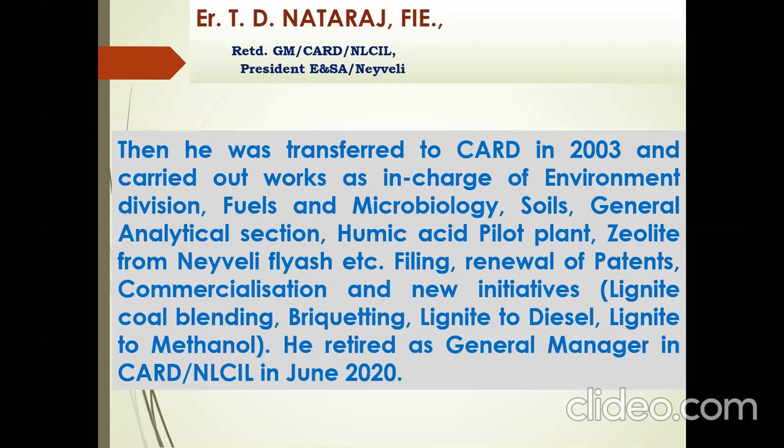Then he transferred to CARD in 2003 and carried out works as in charge of environmental division, fuels and microbiology, soils, general analytical section, humic acid plant, zeolite from Neyveli fly ash, etc. Filing renewal of patents, commercialization and new initiatives, lignite coal blending, briquetting, lignite to diesel, lignite to methanol, etc. He retired as General Manager in CARD NLCIL in June 2020, and still he is continuing as

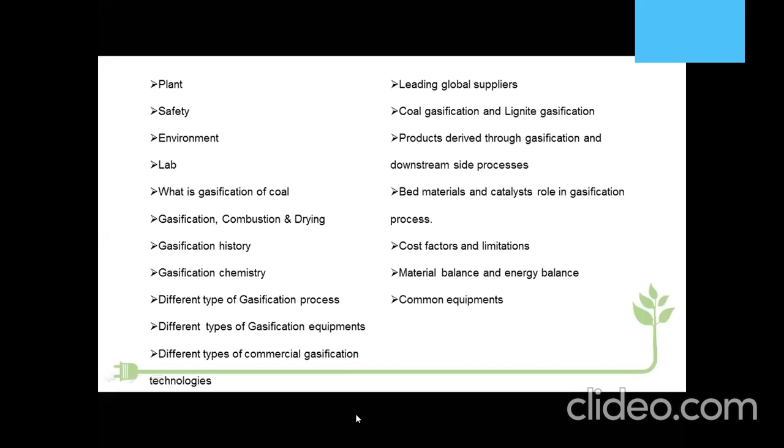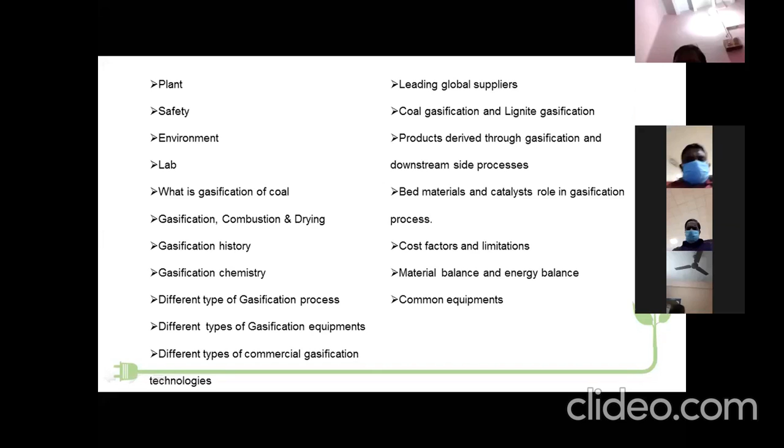You can save energy. So energy efficient, introduction of heat exchangers at proper places, and saving the energy. And another point is pollution. You try to reduce the pollution. Try to reduce the pollution at the bottom. Try to reduce the pollution at the top. So efficient operation is the key of success. They have to do it.

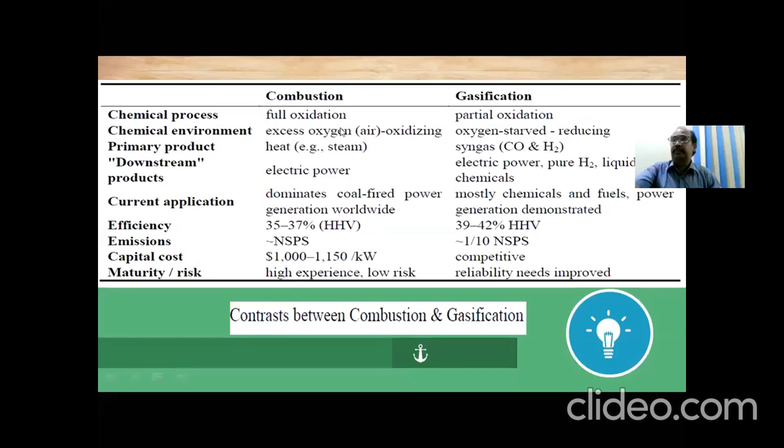And so, the difference between combustion and gasification. Most of you know the basics. However, I will read out what is given for combustion and gasification in this slide. Chemical process: combustion means it's fully oxidized, gasification means partially oxidized. Chemical environment: combustion is an oxidizing environment; gasification is an oxygen-starved reducing environment.

Primary product: for combustion, nothing. After combustion, you will get only rejects, ash, no fuel value. With gasification, you will get syngas. And in the downstream process, you will get electric power, the chemicals, the liquids and other items. Current application: combustion dominates coal-fired power generation worldwide. For gasification, mostly these are chemicals, fuel, and power generation on the downstream side.

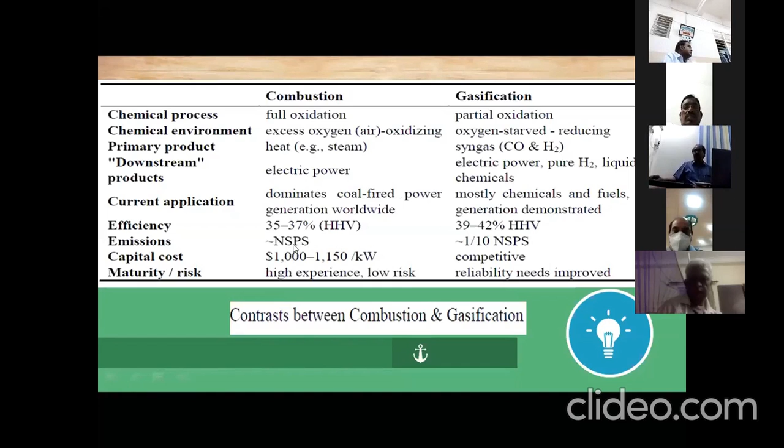Efficiency is 35 to 37% higher heating value for combustion; for gasification it is 39 to 42% higher heating value. Emissions follow the New Source Performance Standards, NSPS. For combustion there is a figure, and for gasification also there is a figure, that should be followed as per the norms stipulated by the Pollution Control Board from time to time.

The CapEx approximate cost is arrived at. They know the combustion side; the gasification side needs to be improved. You cannot do basic R&D while commercializing gasification. Already they should have some experiments, and coal gasification is already there elsewhere. But for lignite gasification suitability, lignite is different from one place to another. Even Neyveli lignite is different from Rajasthan lignite. So the feedstock has to be studied.

For the lignite, proximate analysis, ultimate analysis, heating value matter, and then ash fusion temperature and ash chemistry. Those informations include the Hardgrove grindability index. Coal is hard, with a low HGI number, and lignite has a high HGI number, but it is not strong. It is like a sand mass. The HGI would be 120, whereas coal HGI is approximately 60. So the chemistry and kinetics of the coal and of the lignite have to be studied.

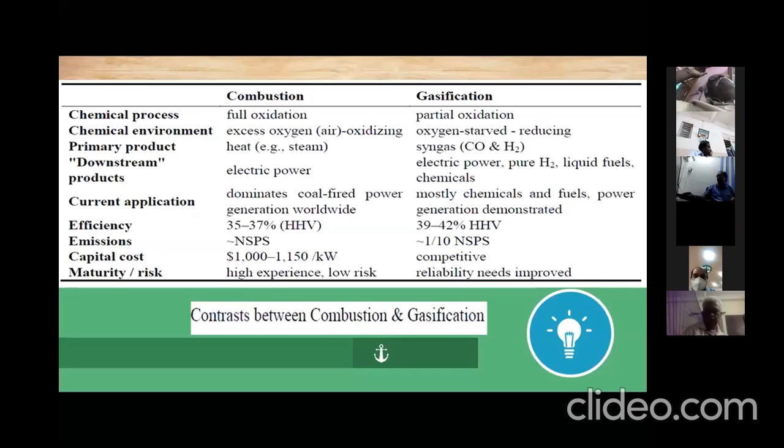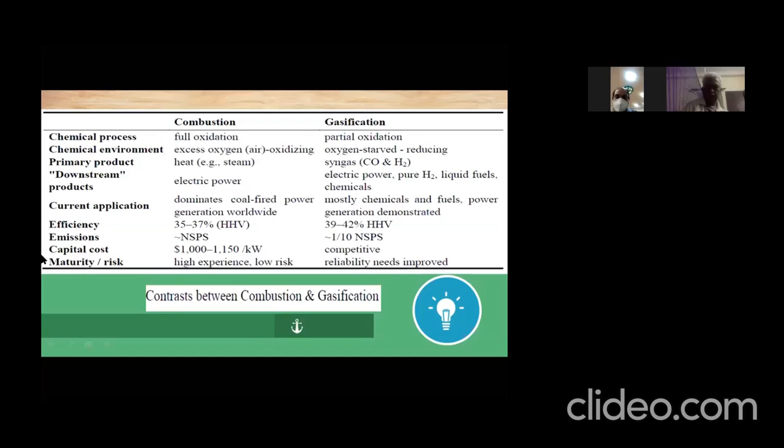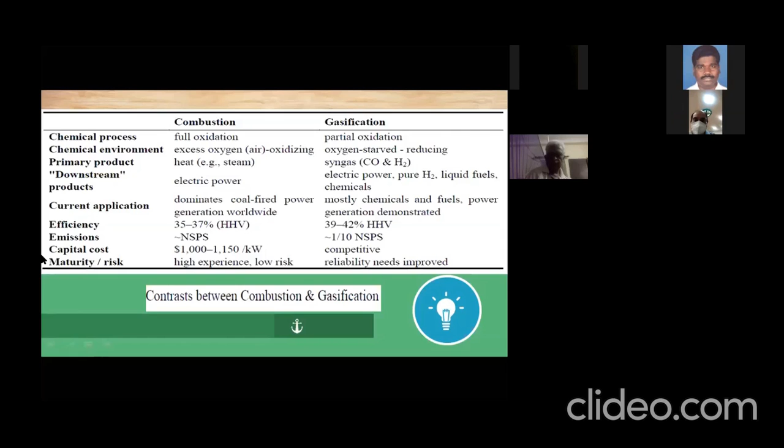You know, the briquetting and carbonization plant started in 1966, but they had already installed the pilot plant in 1957 and did a lot of experiments there. After generating the data, which is available on the net, they established the commercial briquetting and carbonization plant. If you directly invest 5,000 or 7,000 crores and experiment at commercial scale, it is very difficult and will lead to a lot of problems. Instead, with a limited amount, you can do it at pilot plant scale, find out the information, and based on the data expand the project into a commercial one.

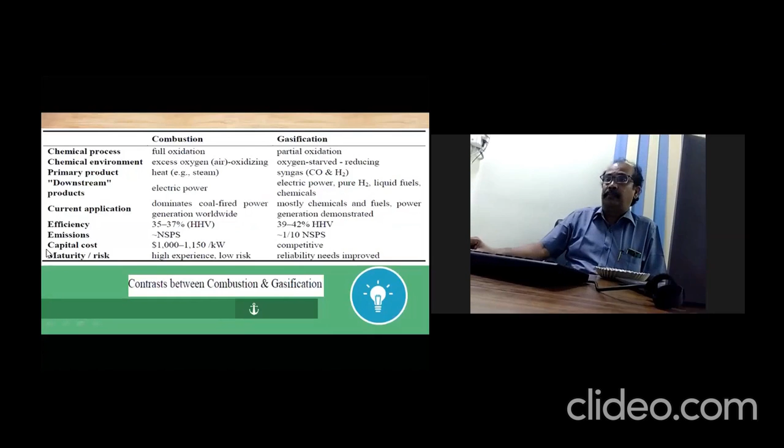Otherwise, if the firm claims they have the facility at their place, internationally or in India, let them quote whatever facility they have. We can move our feedstock, do the experiment at their facility, generate data, and confirm the comfortability of the operation of the system. Once those parameters are arrived at with optimization, based on that you can proceed further. Otherwise, it will be very difficult.

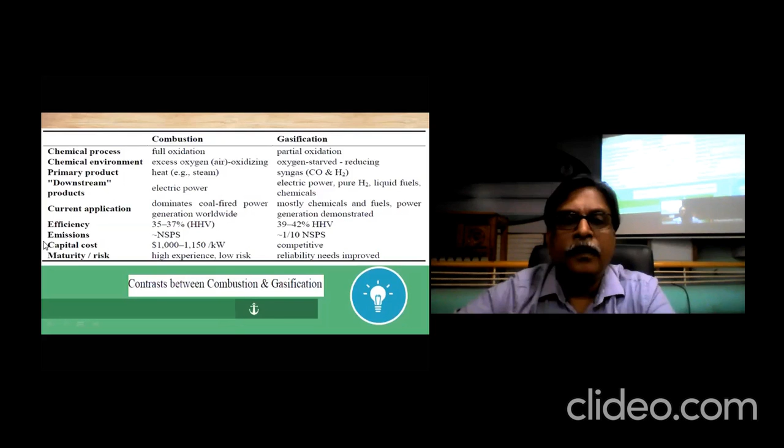What is the reaction? Chemistry of the process. Gasification with oxygen: carbon with oxygen gives carbon monoxide, and this much heat is released. Combustion with oxygen is complete combustion, and that heat is released. Gasification with carbon dioxide: C plus CO2 gives 2CO. These are all the reactions happening inside the gasifier. Gasification with steam: C plus H2O gives CO plus H2. CO plus H2 is syngas. The ratio of carbon monoxide to hydrogen decides the final product; normally for diesel the ratio should be 1:2.

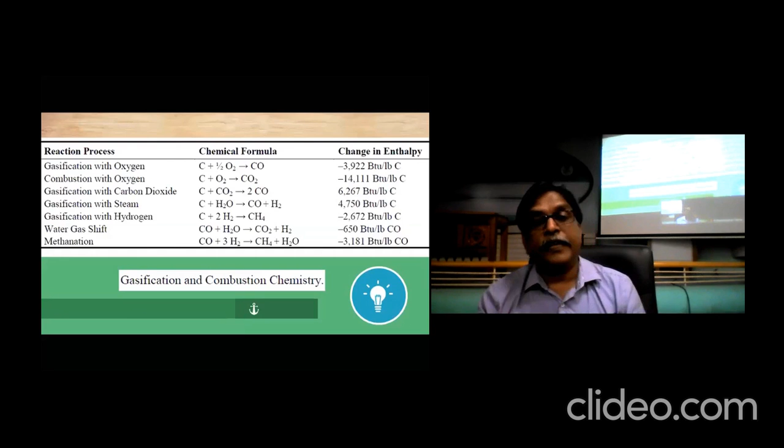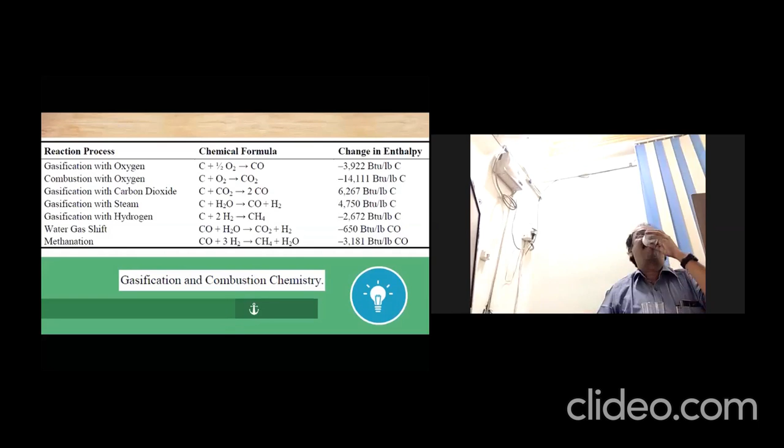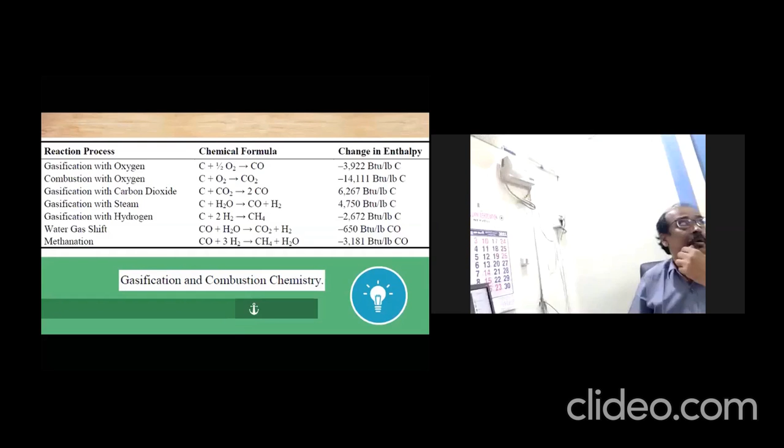Based on that, they use the water gas shift reaction, which increases the quantity of hydrogen and decreases the quantity of CO. That is why it is called the water gas shift reaction. Using that, they fix the ratio based on the requirement of the final product. Then gasification with hydrogen: carbon plus hydrogen gives methane, CH4. Methanation: carbon monoxide plus hydrogen gives CH4. This is the chemistry of the process. So this is the gasification setup.

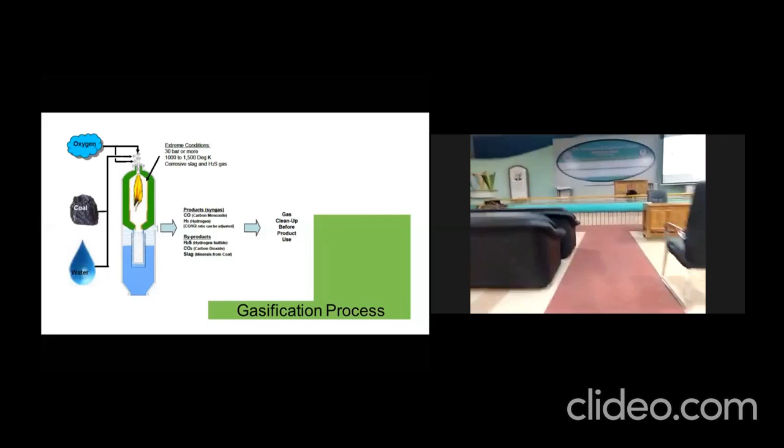How the coal is gasified: coal with the external steam and oxygen for firing. So this coal will fire, and you can gasify the coal. A retort is required.

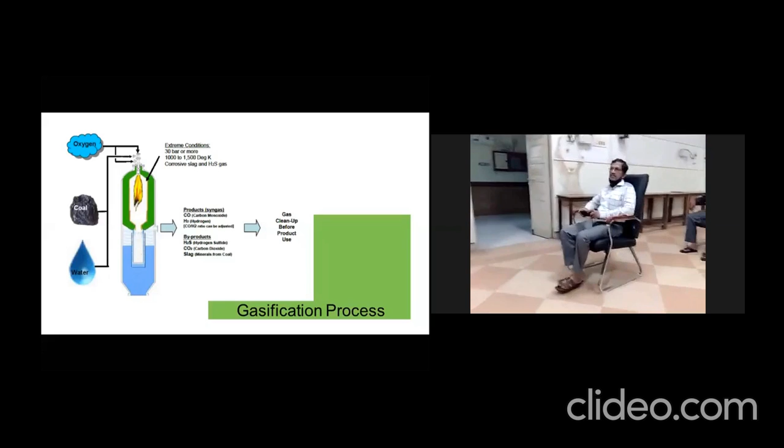So there are three major types. One is fixed and moving bed, another one is fluidized bed, and the third one is entrained flow. Fixed bed means it is a solid material. You have to compact it, or if it is already a solid, then no issue.

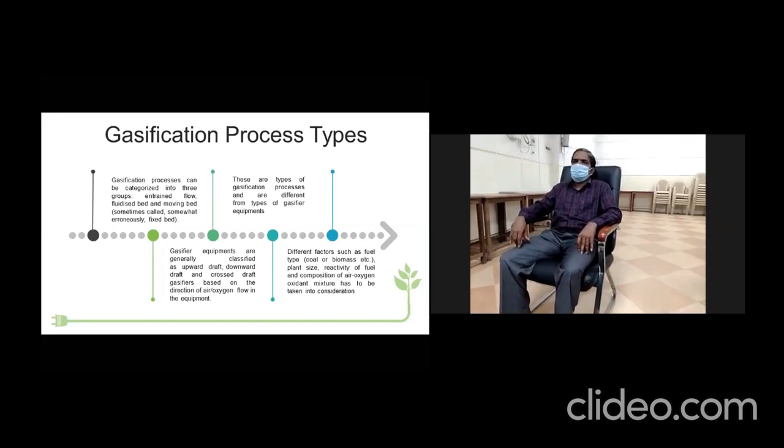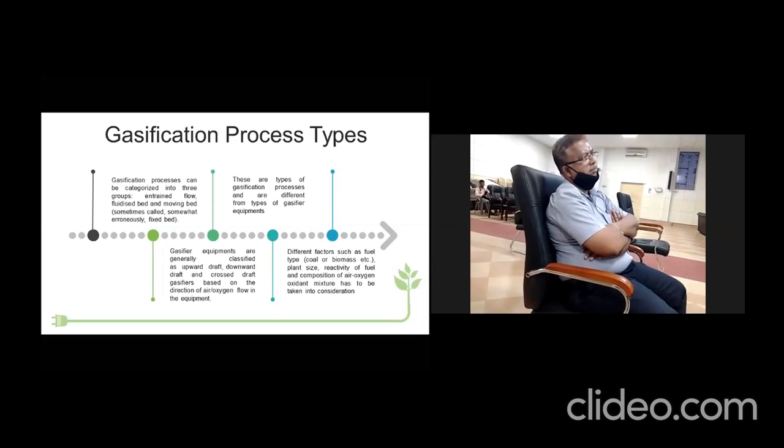So in the vertical retort, another point I would like to explain: there are three types of process. One is updraft, another one is downdraft, and the third one is cross draft. So based on the requirement, the technology will select the process.

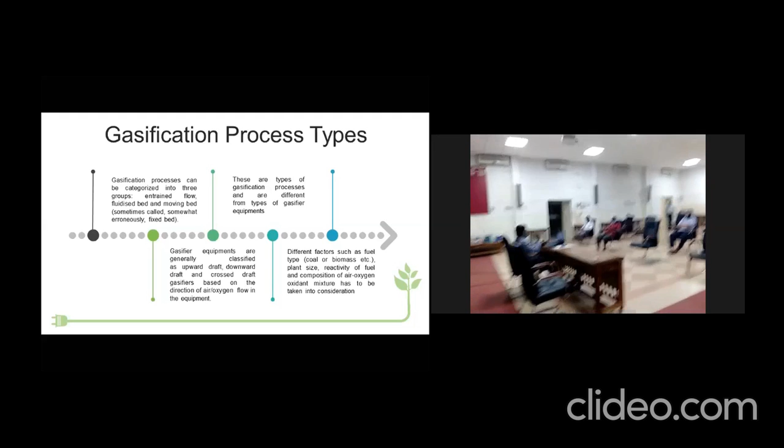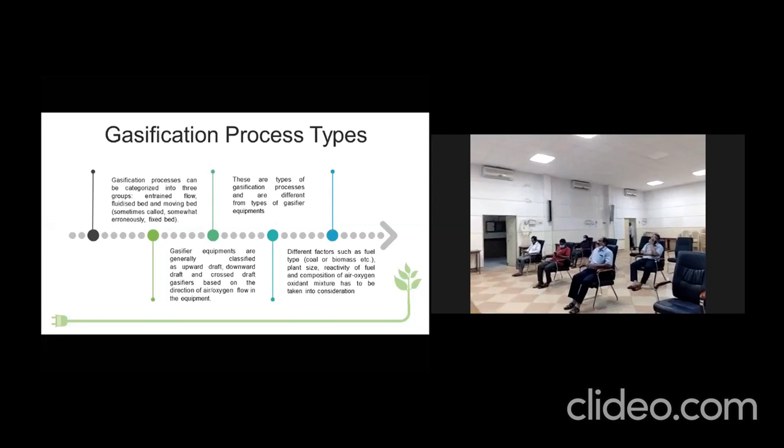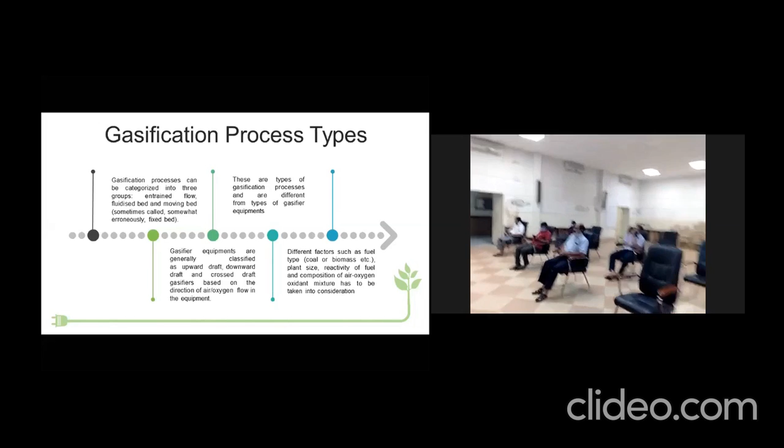And in fixed and moving bed, we use solid for gasification. Fluidized bed means powder material. That powder will get fluidized and then gasified. Entrained bed means it will become a slurry. The material will be totally ground into fine material, and water will be mixed. The slurry is made to pass like liquid fuel. So this is the entrained bed.

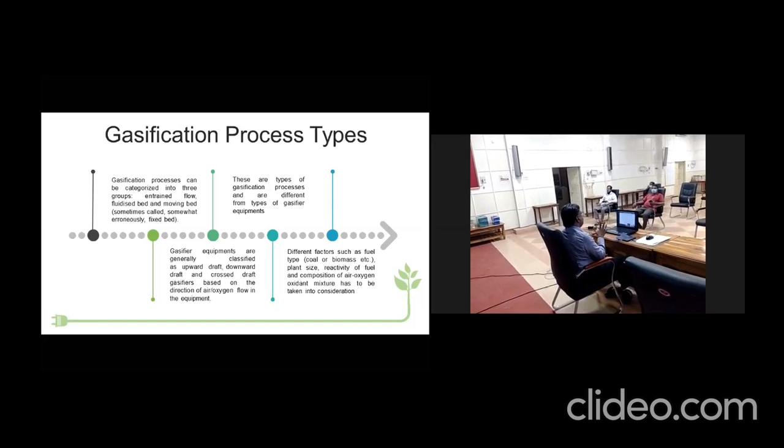Entrained bed is generally costlier. For higher ash content coal, having 30-35% ash, this entrained bed may not be suitable. For lignite, fluidized bed is more apt. Entrained bed is a comparatively costlier affair. The cost will be more if you employ entrained bed.

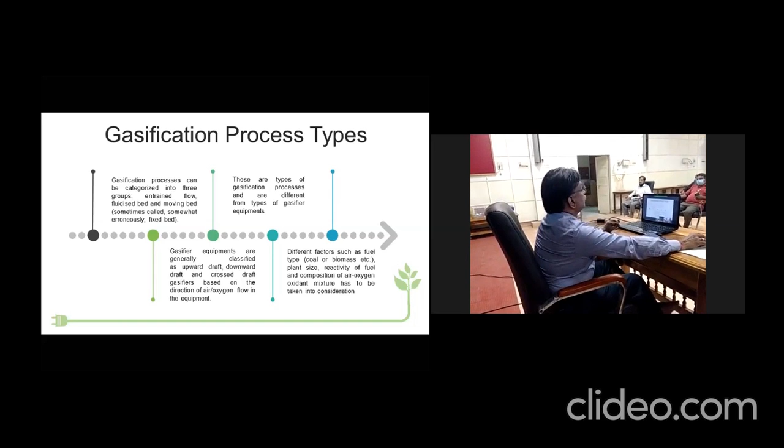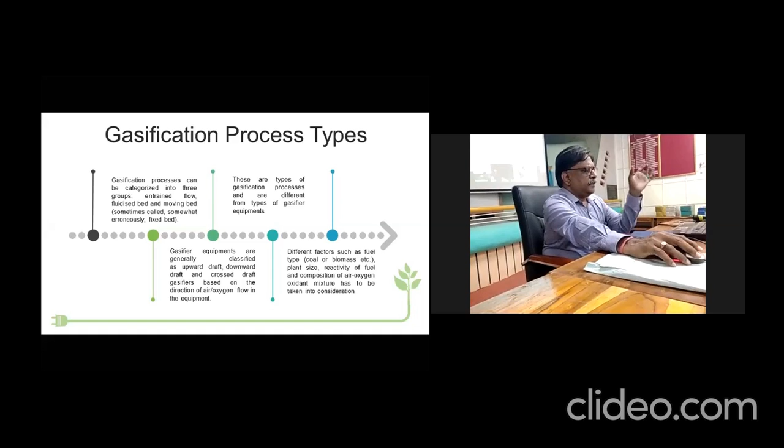But in the entrained bed, the temperature and the pressure are on the higher side, and the conversion also will be high. Perfection will be more, but the capex will be more. So you have to select the process based on your requirement and feedstock. If the capex and your initial investment are more, the product profitability has to be worked out; we should ensure there is some profit. So mainly the equipment cost will decide the success of the project.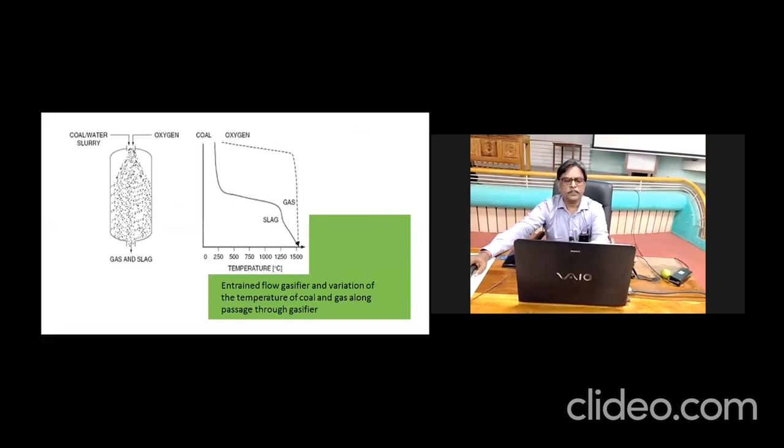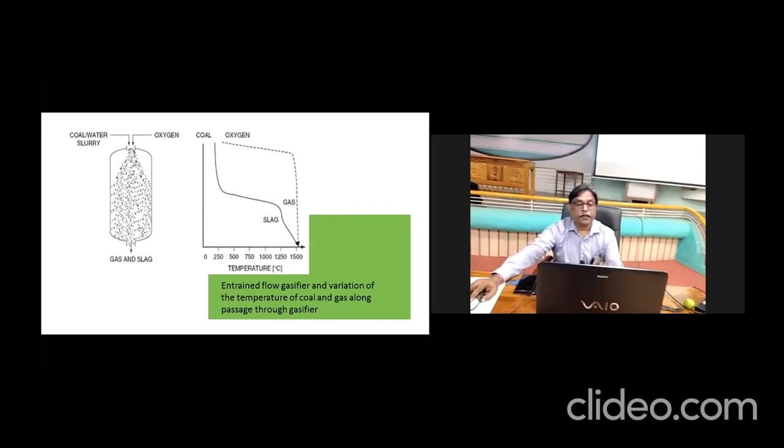Entrained bed gasification. So you can see coal-water slurry and oxygen, and you will receive gas and slag at the bottom. Coal-water slurry and oxygen at the top. In the graph, the y-axis is the entrained bed gasifier from top to bottom: 0 means bottom, and the top is where the coal enters. The x-axis shows the temperature, so you can see the variation of temperature of coal and gas at different heights.

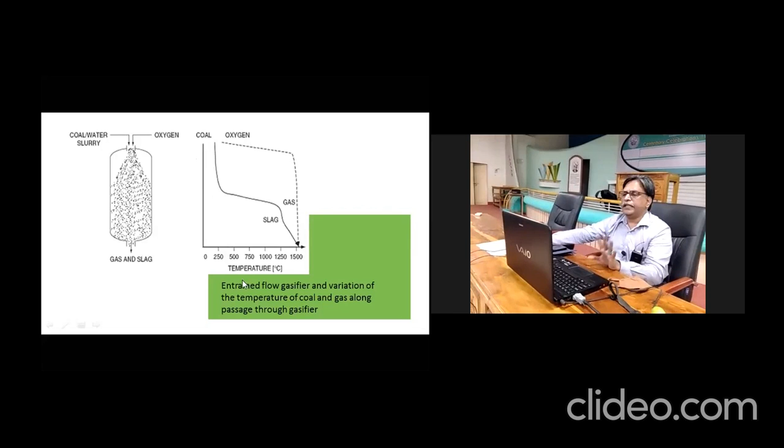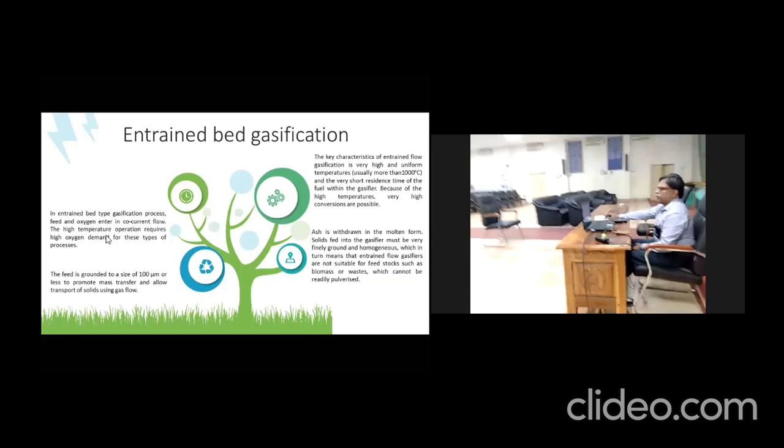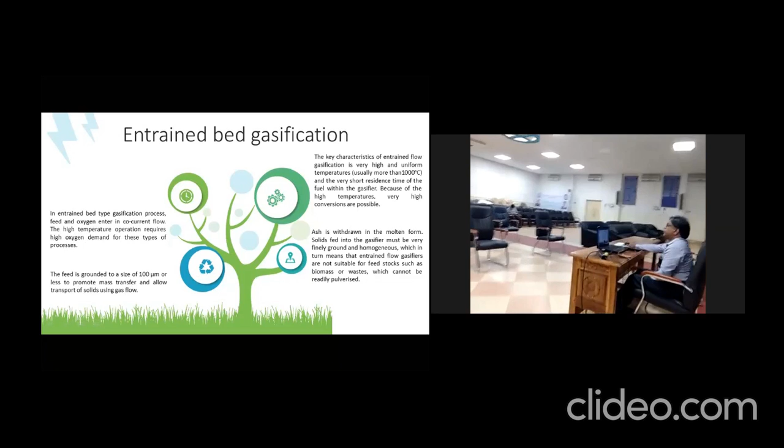This is entrained bed gasification, mainly what I have explained. Feed and oxygen enter in co-current flow. The high temperature operation requires high oxygen demand for these types of processes. Size is 100 micrometers to promote mass transfer and allow transportation of solid using gas flow. The key characteristics of entrained flow gasification are very high and uniform temperature, usually more than 1000 degrees centigrade, and very short residence time of fuel within the gasifier. Because of the high temperature, very high conversions are possible.

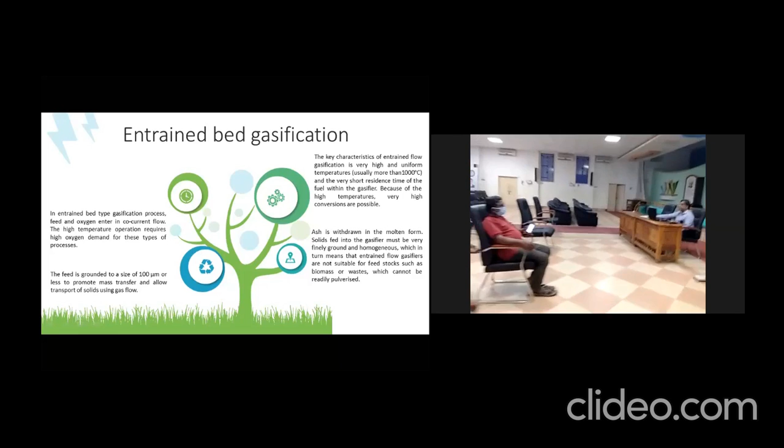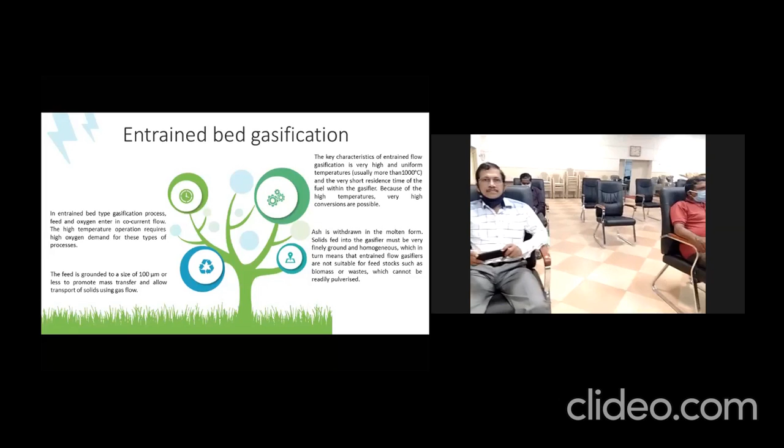Ash is withdrawn in molten form. Solid fed into the gasifier must be very finely ground and homogeneous, which means entrained flow gasifiers are not suitable for feedstock such as biomass or waste, which cannot be readily pulverized. And as lignite has low ash fusion temperature, if ash slag is more, we may find it difficult if we use entrained bed gasification. At present, many offers we have received are based on entrained bed gasification; they should be properly studied. Only then can you move forward.

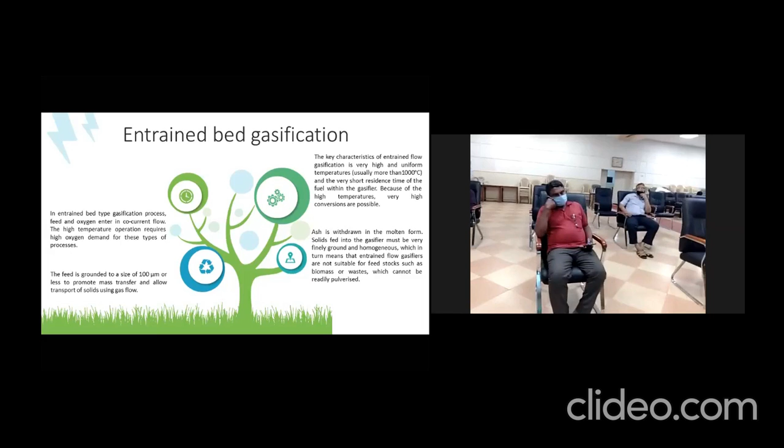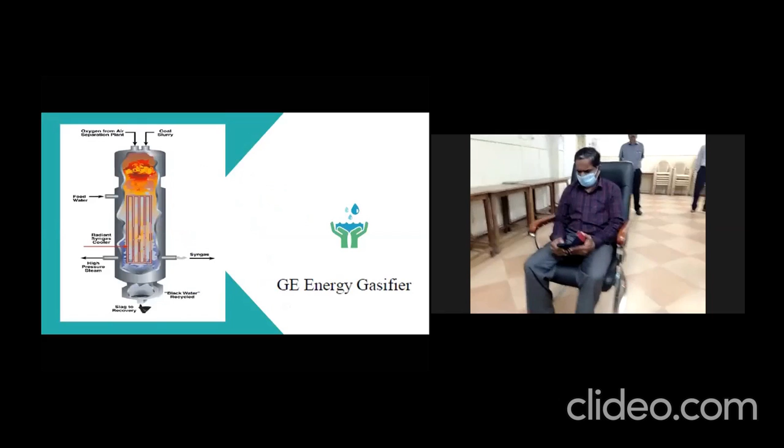And some commercial global suppliers: GE Energy, E-Gas, Shell, Siemens, MHI air-blown, Eagle. These are all companies supplying entrained bed gasification technology.

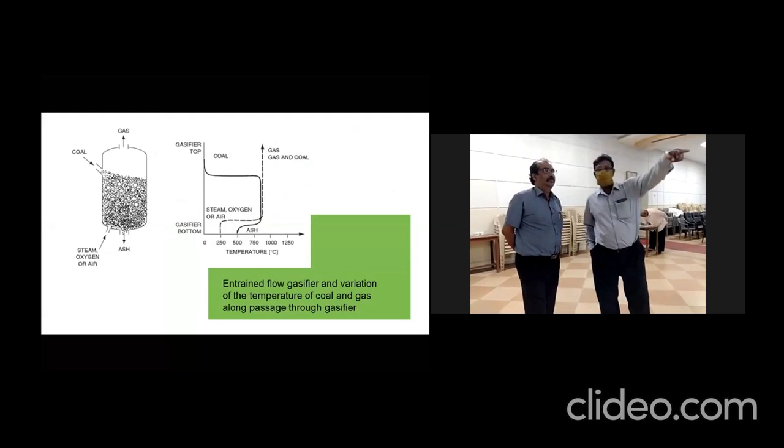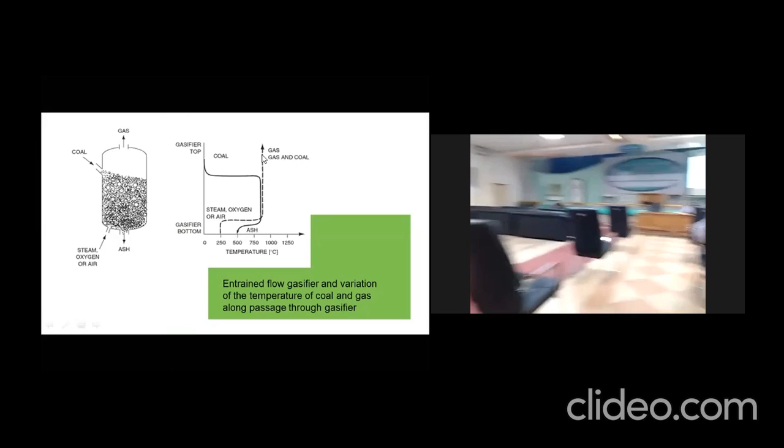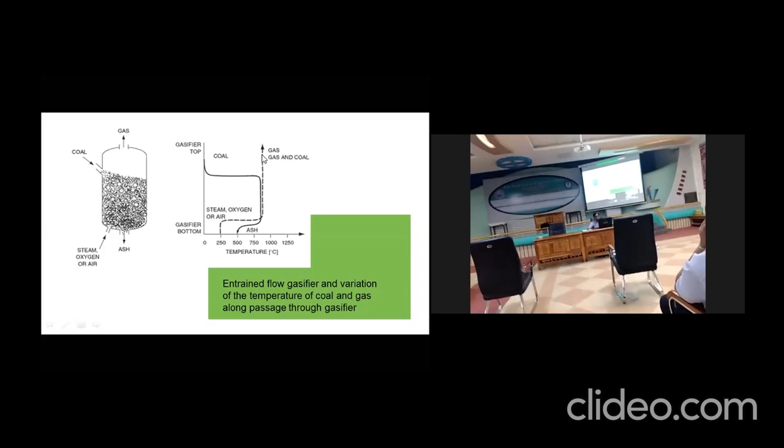So next one is fluidized bed gasification. This is cost-wise less. You see gasifier top and bottom, and the x-axis shows the variation of temperature of coal and gas along the passage through the gasifier. At a particular height, coal is at 250 degrees centigrade and increases, and the dotted line shows gas. Gas from the bottom at 250 slowly increases and reaches 900 degrees centigrade. So for fluidized bed gasification, what points need to be discussed? Size of the particle is critical.

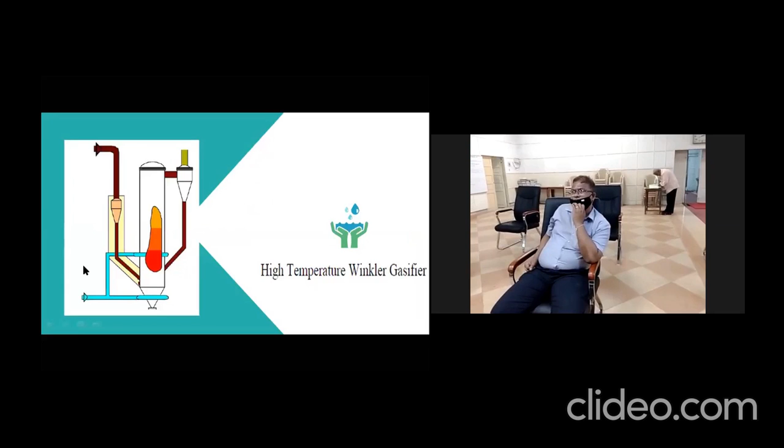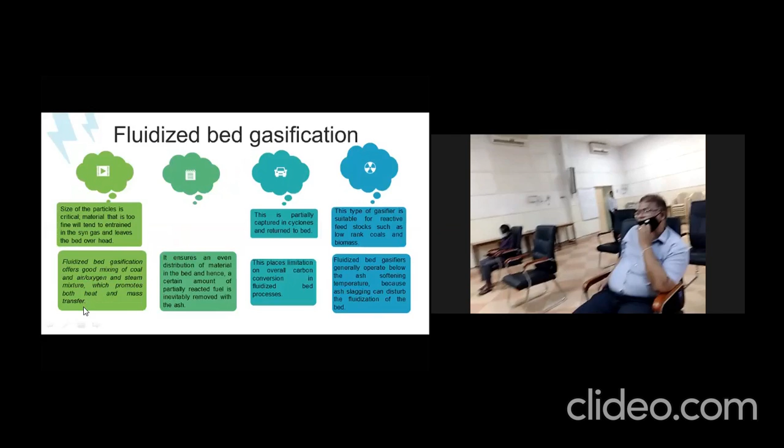Size of the particle is critical. Fines will tend to entrain in the syngas and leave the bed overhead. Fluidized bed: steam mixture which promotes both heat and mass transfer. It ensures an even distribution of material in the bed, and hence a certain amount of partially reacted fuel is inevitably removed with the ash. This is partially captured in cyclones and returned to the bed.

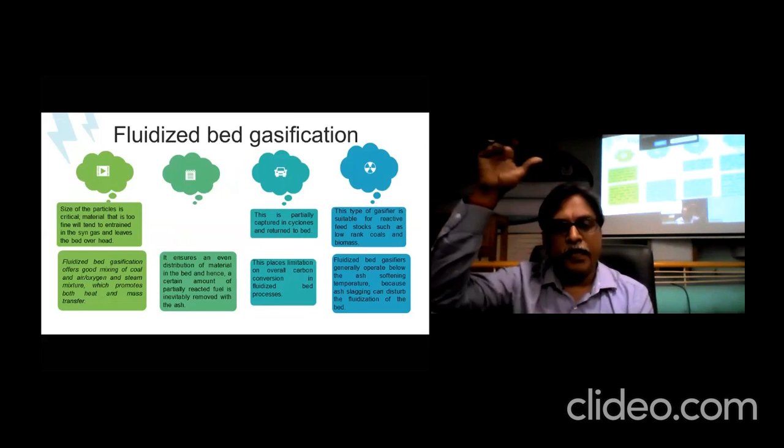Fluidized bed, the upgraded version is circulating fluidized bed. So whatever material escapes at the top, another vessel is there which traps the dust-like material, and it is sent to the bottom again to be recycled. That is why it is called circulating fluidized bed. This places a limitation on overall carbon conversion in the fluidized bed process.

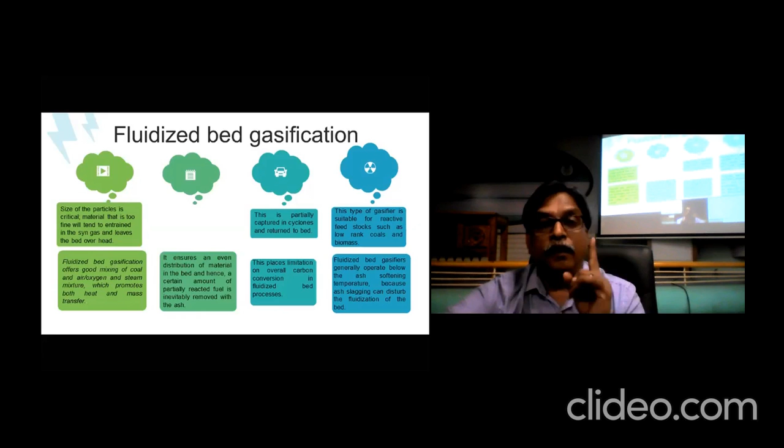This type of gasifier is suitable for reactive feedstock such as low rank coals and biomass. So fluidized bed is suitable for lignite material. Fluidized bed gasifiers generally operate below the ash softening temperature because ash slagging can disturb the fluidization of the bed.

So it is similar. We already have experience in fluidized bed combustion in thermal power stations. That is complete combustion; this is incomplete combustion. So all parameters, all operations are almost similar. So we have experience in that area. Because fluidized bed combustion is suitable for lignite, they decided, and with the help of BHEL, fluidized bed combustion thermal plants have been installed.

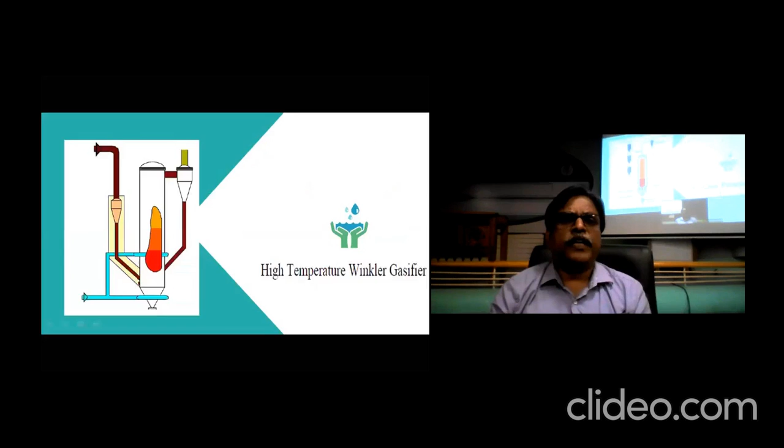So what happened? The plant was operated at 1100 degrees centigrade. Due to that, ash slag formed at the bottom and further withdrawal of ash became a problem. So after 15 years, they reduced the temperature from 1100 to 980 degrees centigrade on the consultant's advice, and afterwards that problem was solved. But with incomplete combustion they experienced 40% carbon in the ash. That is why they could not run the unit. They stopped and switched over to oil gasification.

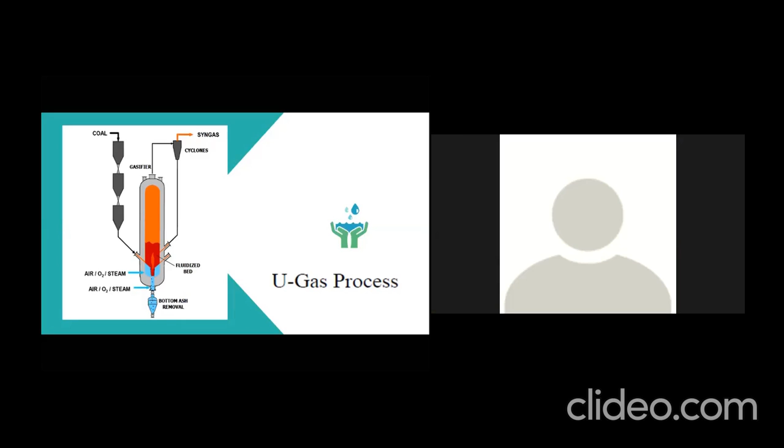This was like a steel unit in NLCIL. So now with the modifications and latest technology, this also can be studied, how to use this technology. Now RWE Germany took up this work, the Winkler gasifier, and they modified it and supplied it to many firms. In 1960, 1970, 1980, a lot of RWE plants were installed elsewhere in the world, and now another company has purchased this technology and they are doing it.

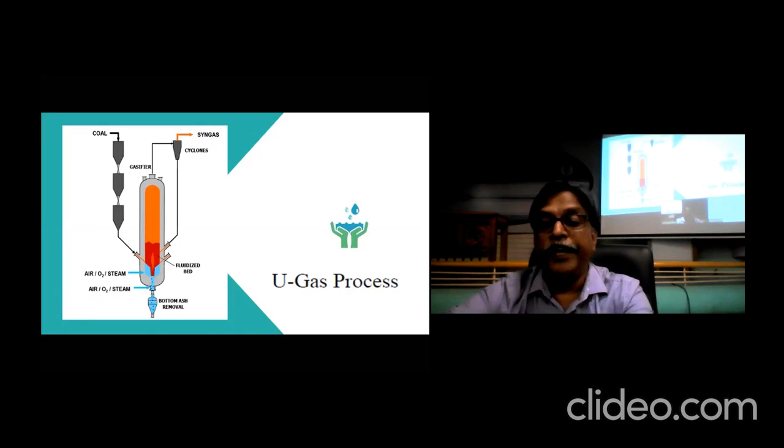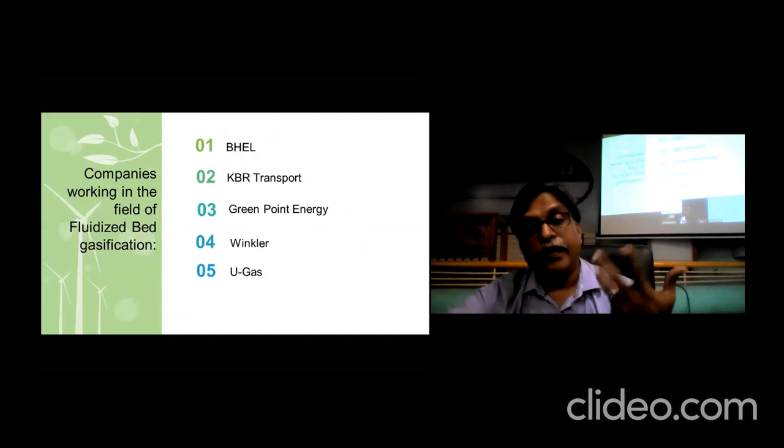So BHEL, KBR Transport, Green Point Energy, Winkler, U-Gas, they are pioneers of fluidized bed gasification. In addition to that, other companies are also there. I am just quoting the main companies. So we have to explore the global suppliers, and based on the discussions, further steps can be taken.

This is moving bed gasification, which I have explained in the BNC plant. So solid material is fed from the top. The first stage is drying, devolatilization, then gasification, then combustion. So at the bottom, ash slag is there. Oxygen and/or air is admitted at the bottom. It will travel upwards. So gas is taken out at the top.

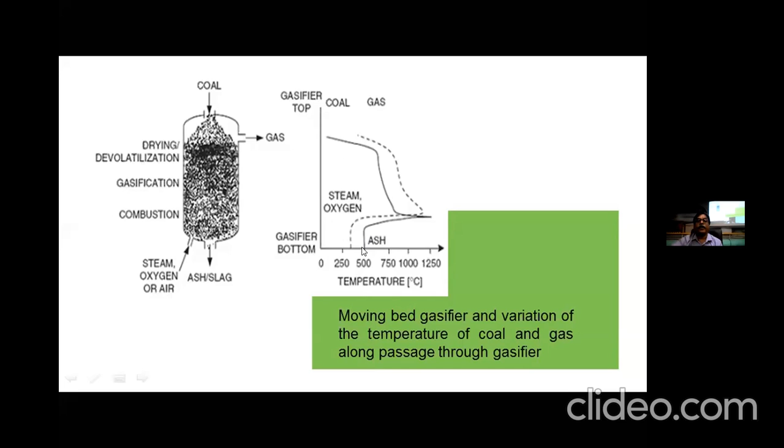Moving bed gas-solid flow patterns. So moving bed gasification: coal which enters at the top moves downwards through gravity and is gasified by the upcoming countercurrent air or oxygen and steam mixture. The hot synthesis gas from the gasification zone is used to preheat and pyrolyze the downflowing coal. With this process, the oxygen consumption is very low, but pyrolysis products are present in the product synthesis gas. This gasifier operates on lump coal and the outlet temperature of syngas is generally low.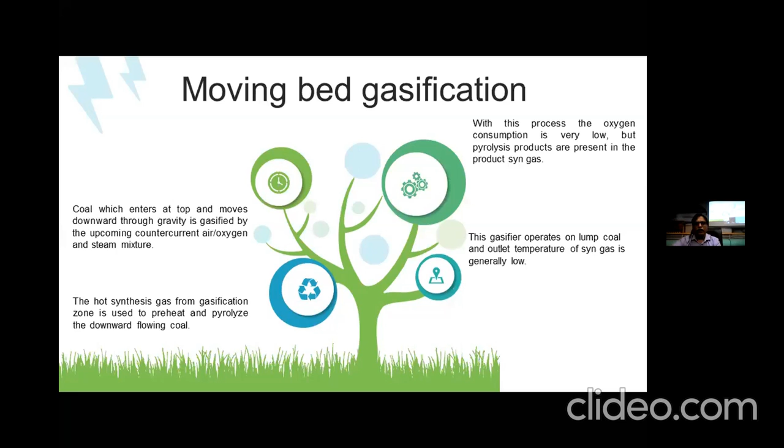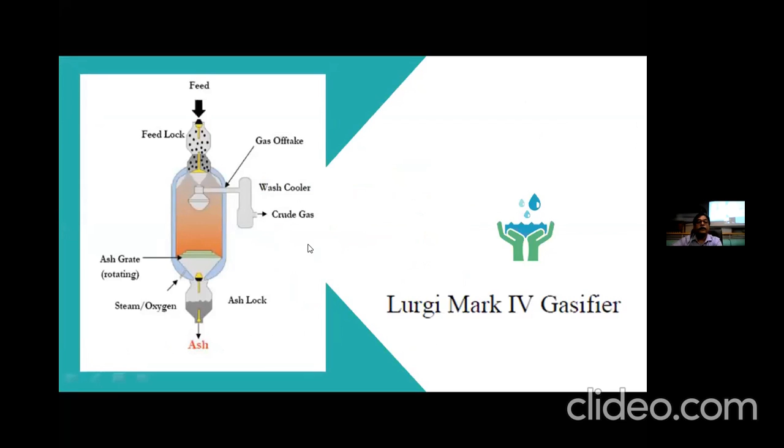This concept was supplied by Lurgi in our briquetting and carbonization plant. Some 9 carbonizers were installed, and always 8 carbonizers were in operation. 1 is kept as spare. Mark IV gasifier. This is the latest version, what they supply now. The companies working in the field of moving bed gasification are Lurgi Dry Ash, British Gas Corporation, and other companies are also there.

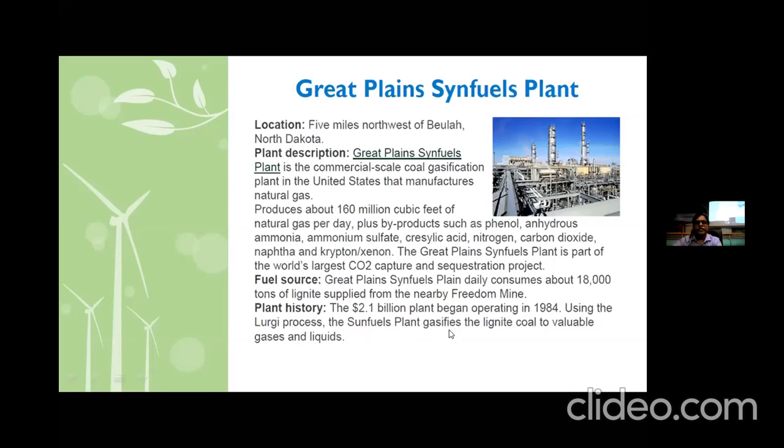So this is the Great Plains Synfuel plant. It is situated in the United States and manufactures natural gas, 160 million cubic feet of natural gas per day. It is one of the biggest plants. Installed in the year 1984 using the Lurgi process, the plant gasifies lignite coal to valuable gases and liquids.

So slurry, licensed pet coke, whatever experience. Air Products is interested in carrying out syngas production from lignite. They have expressed their interest, discussions are on with NLCIL, and they have experience of what they have had.

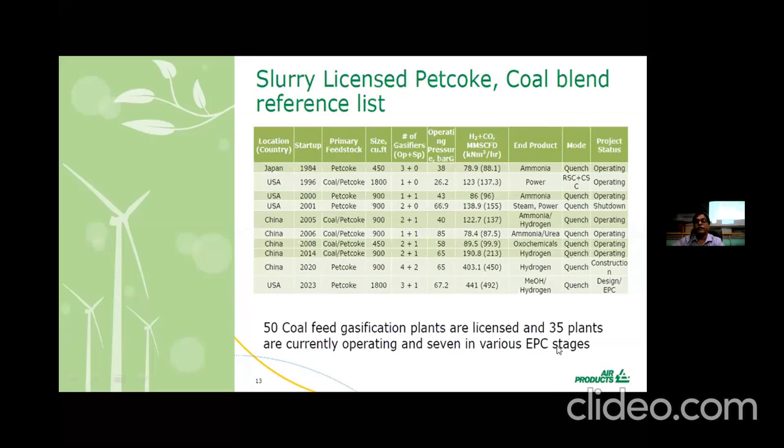They have supplied some few plants to so many countries, which is listed here. 50 coal feed gasification plants are licensed, and 35 plants are currently operating with 7 in various EPC stages. This is the status of Air Products.

Their experience, wherever they supplied - Jindal Steel Plant, India, and then Dakota Gasification Company, USA. Like that they have also supplied and they have experience. So many gasifiers they have installed.

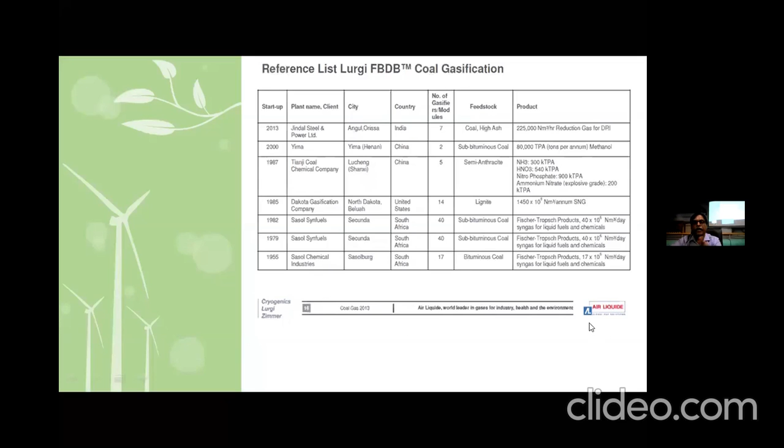Air Liquide - this was Lurgi. Lurgi's name is now Air Liquide. This is E-Gas. How they traveled: first bench scale, then prototype, then LGTI, then Wabash River. 36 tons per day initially, then 1,600 tons per day. And from '87, 2,400 tons per day. Like that, they have increased their capacity based on their experience. Lignite, they have handled lignite, subbituminous coal, bituminous coal. Like that, they have a lot of experience. So this company also can be discussed, called and discussed.

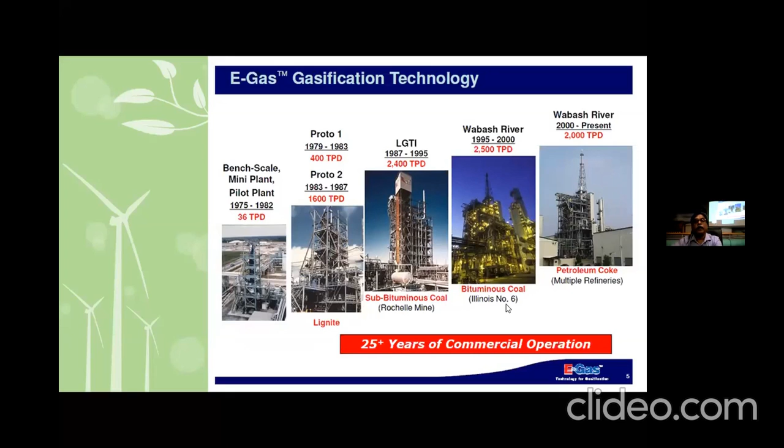They test with our feedstock, and they generate data and give it. This is tons per day. Gasifier coal capacity 1.2 - this is available in Hyderabad, semi-pilot scale, APFBG. Now we have supplied some 8 tons lignite to BHEL Hyderabad, and they are carrying out some experiments, fluidized bed gasification study. Now they have already taken up work with Coal India. So only after completion of the Coal India study, they propose to take up this lignite-based gasification study.

Then PEDU, 18 tons per day. PFBG, 168 tons per day. It is in Visakhapatnam, 160. This facility is available in Visakhapatnam.

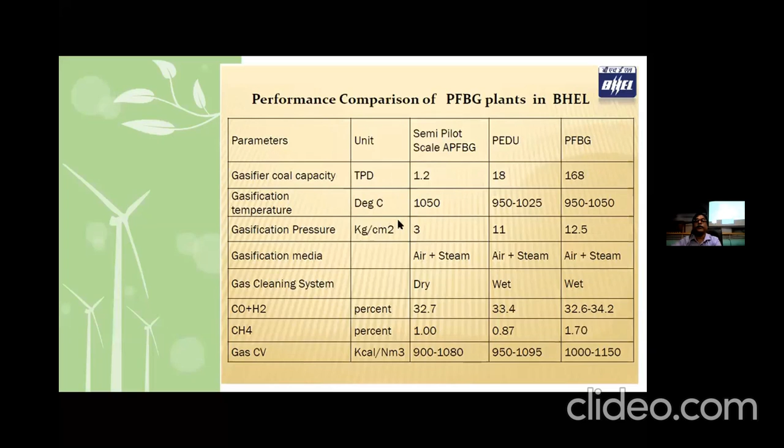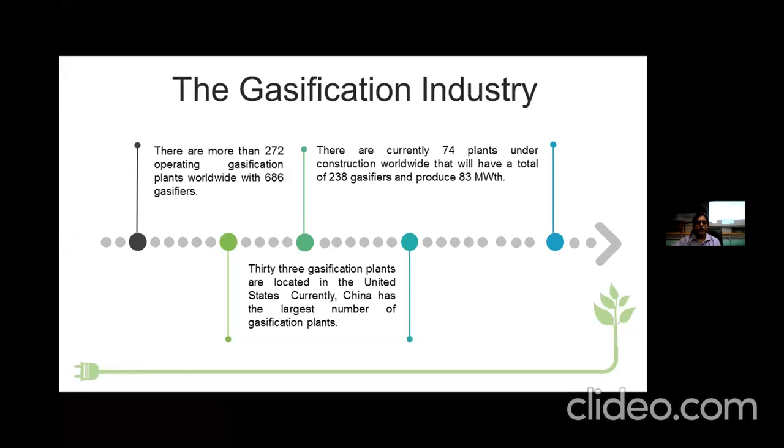Gasification history: there are more than 272 operating gasification plants worldwide with 686 gasifiers. There are currently 74 plants under construction worldwide that will have a total of 238 gasifiers and produce 83 megawatt thermal. 33 gasification plants are located in the United States currently. China has the largest number of gasification plants now.

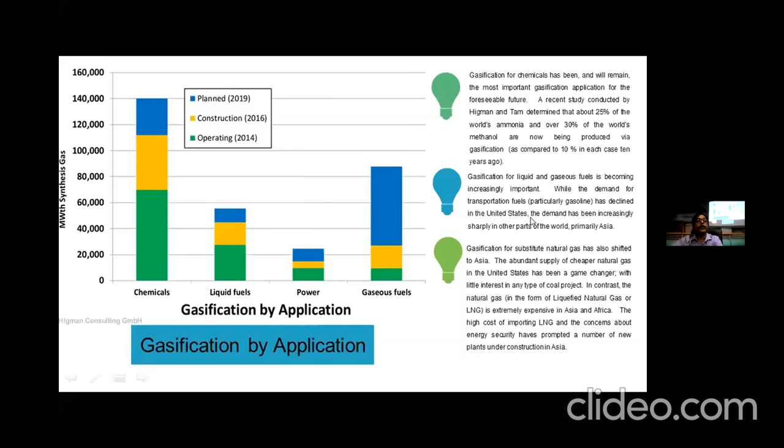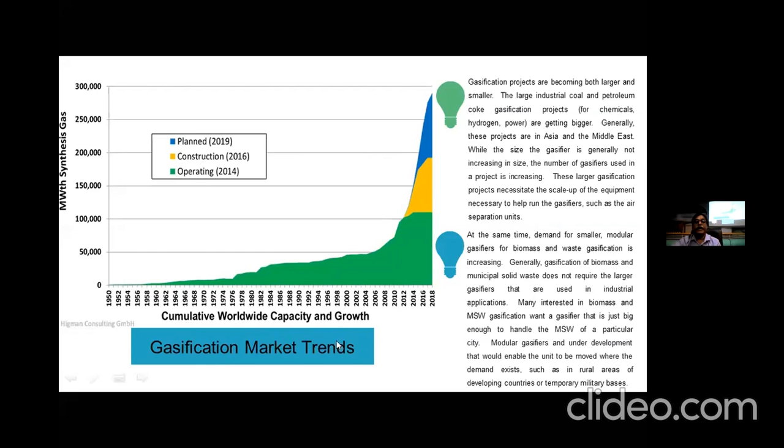Combustion side, fluidized bed combustion is selected. It is proven, so it is a safe game we are playing. More thermal plants based on lignite are set up. But gasification side, it is not planned. It is not a safe game. You have to do a lot of homework.

All points should not be omitted. Though there should be some argument between buyer and seller, a common understanding has to be reached. But seller also, I request, have to cooperate, because coal and lignite companies are mostly government companies. They are trying their level best to accommodate, how to proceed, how to install the plant, alternative energy source. They are seeking a lot of avenues. So they should consider those points, and they should join hands supporting Coal India and NLC for the success of the gasification plant.

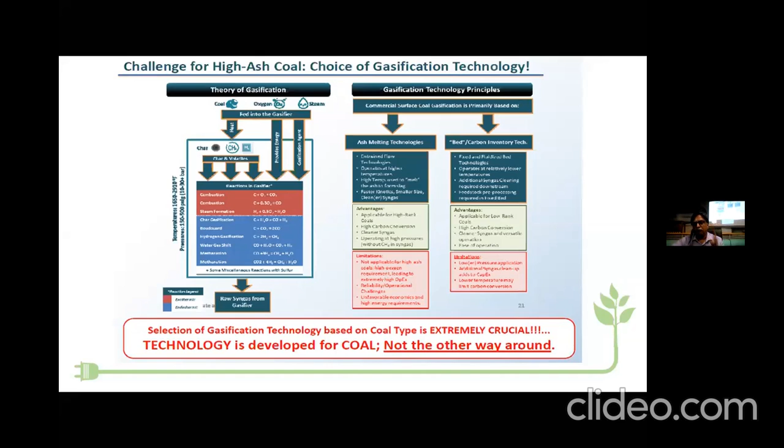Consider all information, all points - safety point, fire point, environment point, and all other facilities, utilities, nitrogen, steam, air, everything. Don't leave anything. Put it in the nutshell and include all information in the project, all points in the project, and work out and arrive at the production cost. That will be more optimal. Don't compromise anything. That is my request.

The Indian Oil Corporation is encouraging compressed biogas, which is produced from biomass. So a lot of plants are coming up. They are even making agreements for purchase of the compressed biogas, which they sell through Indian Oil Corporation outlets. So there are a lot of projects coming up in India now. They may be expecting support.

Welcome, sir. Gopal, sir. Yeah, yes. You throw some light on the gasification side. What is the current status?

Current status, if you see, the major player is only Air Products. They are now preferring not the slurry-based process, because slurry is less efficient. So they are preferring a dry feed, like grinding it into a fine powder, similar to boiler milling. They do the milling and inject it like in a boiler. So it's a slagging type, meaning the temperature of the gasifier will be above the ash fusion temperature, so the ash will fuse and form a slag, which is taken out at the bottom. That is how their process is involved.

Okay, so slurry is less efficient, that's what they say. As you told, we have to do a lot of base work and find out the data from them to see which is better. But they are preferring dry feed, that's what I understand.

Coal now, the tender is due for opening this month from Coal India. They've already given the tender, and the opening date is around a week or so from now. They gave it on a build-own-operate basis. So how many players, how many quotes they get, that will give a good idea.

Most of the gasification technology providers are all out of business now, because in the past 30-40 years, nobody is doing it other than China. Either in Europe or India, nowhere is gasification happening, even in Australia, nobody, because all the lignite and coal plants are just closing down. Even in Germany in the 1960s-70s there was some gasification plant, but it's not operating anymore. Only in China now, except China, nowhere is gasification operating. So most of the gasification in China, they have developed their own technology, and in some places, there's Air Products. Air Products is nothing but Shell and GE, both technologies have been taken over by Air Products.

So this was the status. Anyway, when NLC gets some technology and expresses some interest, we'll get a better idea of who are all in the field, who are all in the market. We'll come to know.

They have to consider lignite feedstock, which is different from coal. China has done it, there is some lignite feedstock available. In Inner Mongolia, China, one of the provinces, they have done lignite gasification and also produced methanol from it. Now, two negative points: one is spontaneous combustion, another is it is highly reactive. So those two points have to be considered. It is totally contrary to coal, and based on that, the study has to be done.